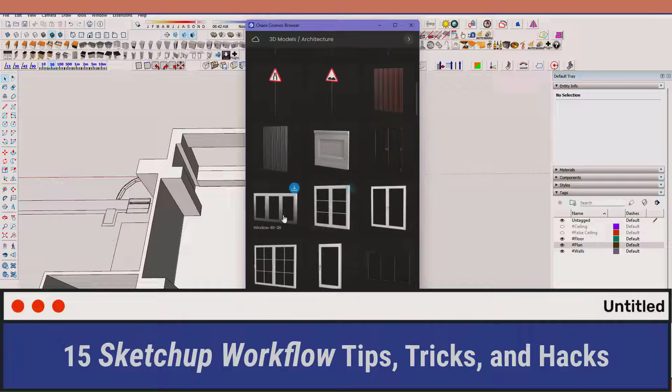In today's video, I'll walk you through 15 SketchUp workflow tips, tricks, and hacks for an easier, more streamlined workflow. These 15 tidbits will save your time, energy, and sanity. Now let's get to it, shall we?

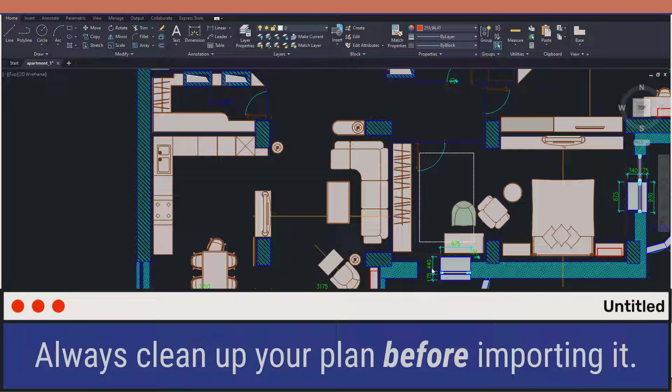Starting with a tip: always clean up your plan before importing it. That means remove any furniture blocks, layers from MEP, or hatching, and purge your file before importing it into SketchUp. This will help prevent any glitches, and you won't have any unnecessary lines to sort through.

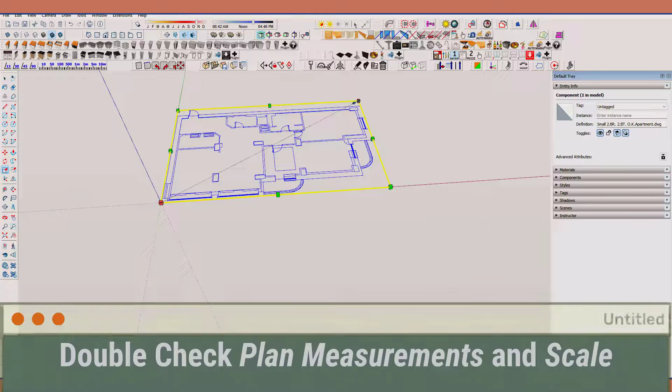Speaking of importing, I know this sounds silly, but I always double-check my measurements and scale. This habit has saved me on a couple of occasions.

Something that has also become a habit is that I always lock my plan before tracing it. This gives me the freedom of being able to just delete any line without having the whole plan go with it.

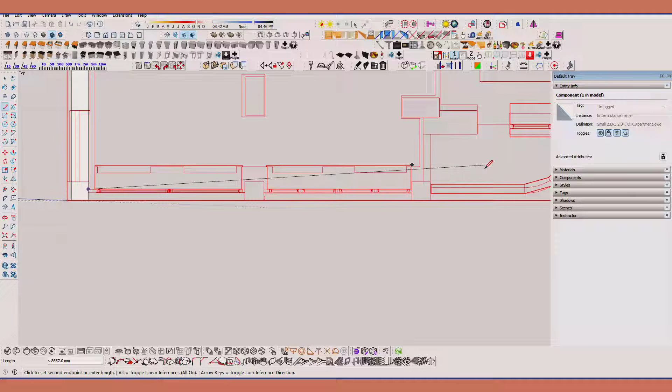And to make sure that you don't have to delete anything, use keyboard shortcuts to lock your line tool to an axis or a direction. It doesn't take much time to get used to the keys, but once you get the hang of it, using keyboard shortcuts becomes second nature.

Now, most of us have autosave on by default, and you may set it to save every minute or every 10 minutes. If you're the latter, then you probably need to remember to hit the save button after every major change or progress, regardless of whether autosave is enabled or not.

Now that we're talking major changes, one of the changes to my workflow that has made a huge impact is using tags to organize anything and everything in my file. The trick to make this more manageable is remembering to do this early on before the project gets too complicated.

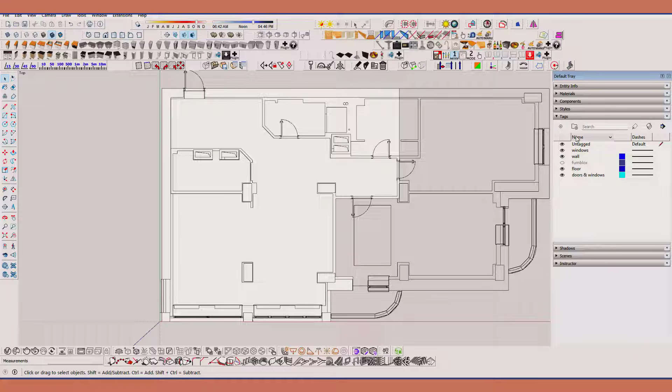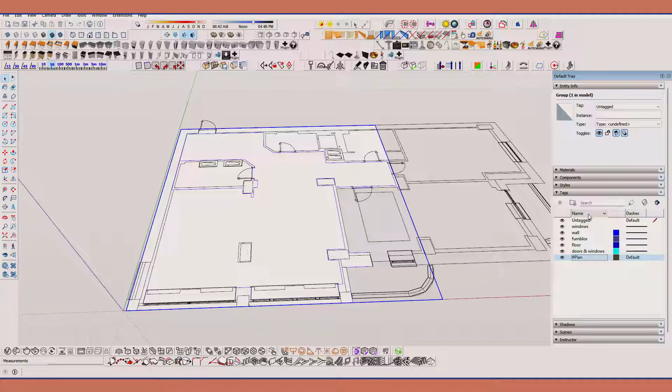A trick I have up my sleeve to make this much easier: basically making SketchUp merge tags for me. When deleting tags with assets assigned to them, SketchUp asks you where it should assign these assets. So I just create a tag and then select this tag when deleting the layers that I want merged. SketchUp will now move them for me into the new tag I chose and get rid of the rest.

Small tip: early on in modeling, you want to keep the entity info window and the tags window open while you work. This helps you to easily spot what is where and quickly do any adjustments if necessary.

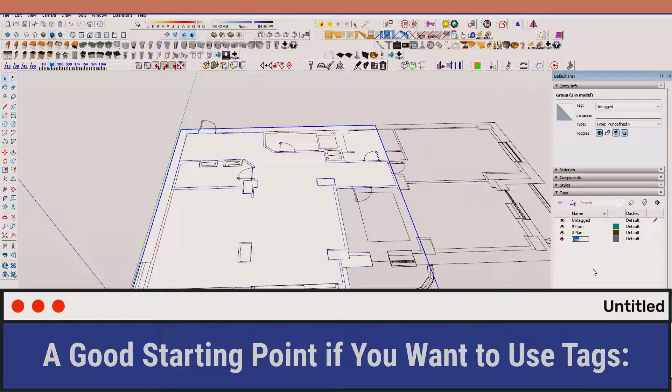Something I wish I could use as a template for every project file is a file that has these 5 basic tags built in: plan, floor, walls, ceiling, and false ceiling. I type in the hash symbol before each name, basically to keep them at the top of the list.

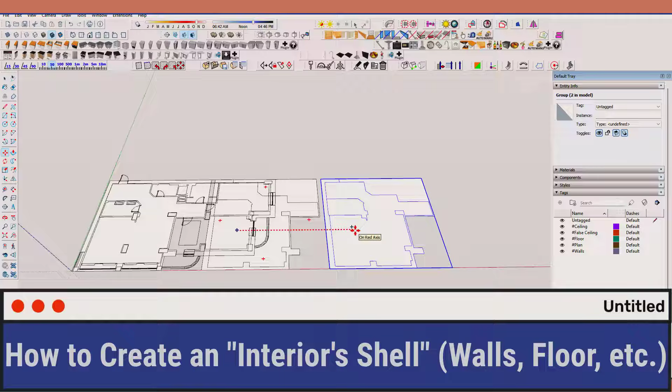But then you may ask, what do you use them for exactly? Well, I usually start by copying the plan I just traced and grouped, so I have 2 extra copies. Assign the first plan to the floor tag, and then extrude it to be a slab. I copy that slab and assign it to the ceiling tag. For the second copy of the plan, it gets assigned to the walls tag.

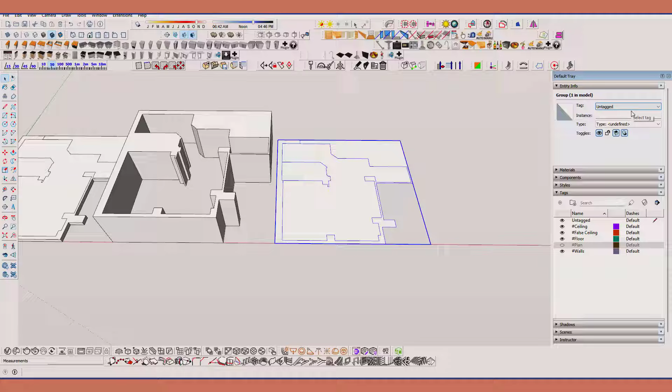I open the group and delete the floor plane and extrude the walls to a specific height. Third and last copy gets assigned to the false ceiling tag and hidden away until the furnishing stage of the process. After I stack everything together, I usually just move the imported original plan on top of the floor plane. This makes it easier to find the location and width of door and window openings, depending on the plan, of course.

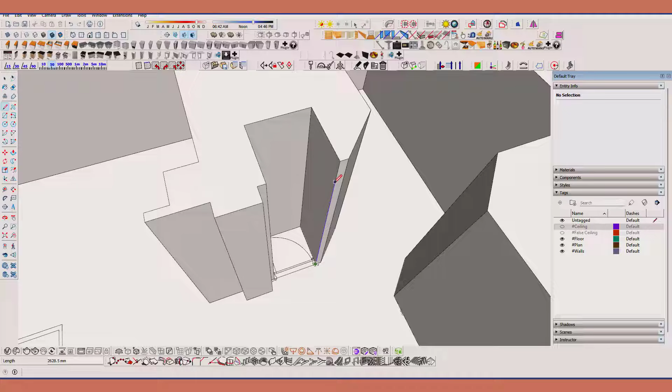Now, while creating those openings, a handy tip to know is using the Shift key to lock down lines and rectangles. Start by drawing the line from its starting point and lock it to its direction by pressing the Shift key, and don't release until you're done.

While keeping the Shift key in mind, you can take this a step further and use other objects or entities as reference for measurements, exactly like how I use the door opening's height to set the window height.

Now for the last couple of tips. Use Chaos Cosmos to find render-ready assets. My favorite assets are usually plants, clutter items, and 3D people. Windows work great too. And for not-so-render-ready items, the 3D Warehouse built-in browser is a great way to download single assets directly into your model.

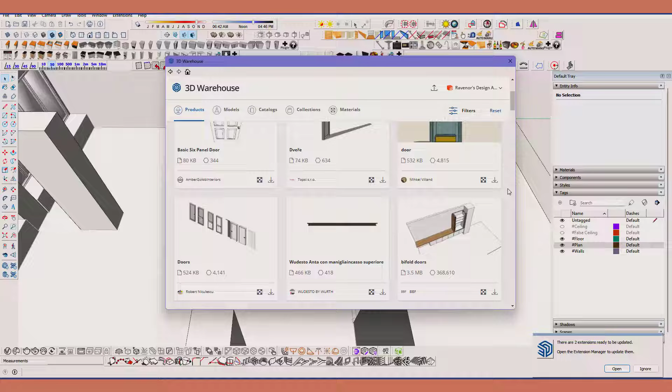I don't recommend downloading complex assets straight into your model because it can either corrupt your work or overload your file with unnecessary junk, basically. So don't take any risks there.